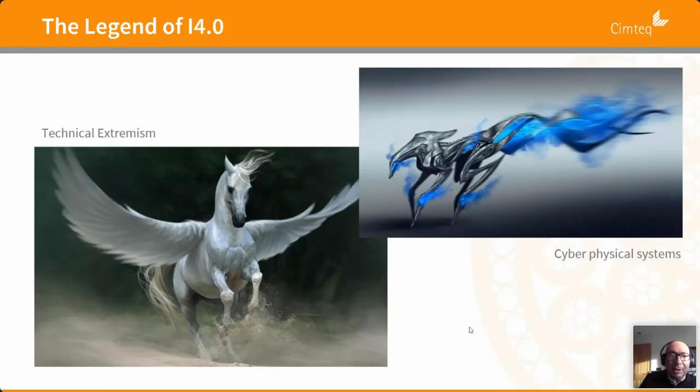Now, things have changed since then, and reality has struck, really. So the reality of Industry 4.0 is to achieve business objectives in the quickest possible way, at the lowest possible cost and the highest possible quality. That is really what we were trying to do with Industry 4.0.

So that said, let's look at what has been achieved over the years, not necessarily in the last year, but in the last few years, where Industry 4.0 technologies have been used. Mainly, we'll talk about that later, MES and digital twinning, etc.

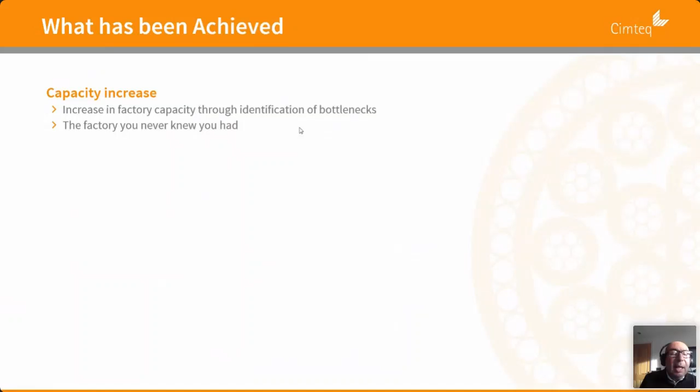What it's done to factories is in the area of production capacity. It has revolutionized that, because by installing an MES system, for example, you're able to look at your production and identify bottlenecks in your factory. By solving the bottleneck issue, removing those bottlenecks from your factories, the products will go through much quicker. It's like a factory you never knew existed, like using extra capacity you never knew existed. With the use of MES, you can see where work in progress is backing up, identify bottlenecks, resolve them, and monitor the progress of that resolution too.

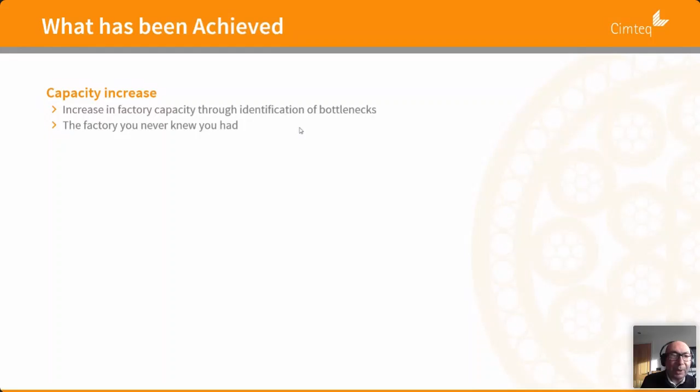Material savings: this is, again, a typical example from one of our customers, using our MES and our cable design system, Cable Builder. The two are linked together, so information is passed from the production lines about radial thickness, or diameter. In the background, we have an SPC analysis engine going on. When that's finished its job, it starts recommending things to the design engineer about how to improve the design, the material utilization on the design. It says, come on, you are giving away too much material, consider enforcing running the process closer to the target, because this factory has been set up for many years. Tolerances haven't been changed, but processes have been improved, and the process in this case is much more capable than the design engineers were designing the cables for.

So they saved a lot of money. This is a jacketing line. They saved a lot of money on materials, so reduce the material usage, improve the profitability of the factory, etc.

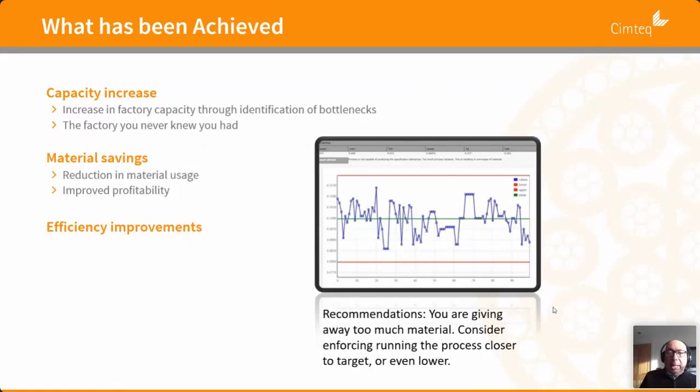And next, I want to come to efficiency improvements. So decreasing of downtime using downtime analysis, increasing machine speed using OEE and various losses analysis, etc. And as linked again to capacity, improving lead times, because we're running faster, you are producing quicker and improving lead time.

And finally, quality improvements. And all this we have seen, this is in the last few years have come out of these technologies. So quality improvements, mistake prevention.

I can give you an example where an operator is busy making a fiber cable. He puts in a reel which contains fiber into a cable, and then this particular machine is connected to MES, and suddenly the machine starts alarming and stops him using that fiber because it's the wrong fiber. So he scanned in the wrong fiber to use on that particular product, and that one incident has saved our customer over $50,000 of scrapped cable. Not to say the embarrassment of shipping something that is wrong to the customer.

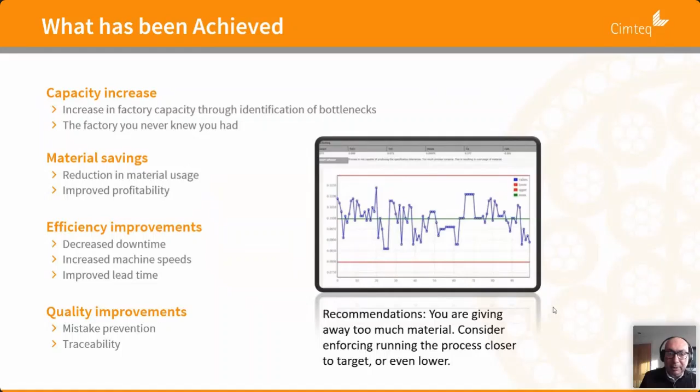Okay, so we talked about what can be achieved with Industry 4.0 and smart methodology, and I want you to remember something. Remember that message that is coming from the machine, effectively, to the design engineer to tell them what to do.

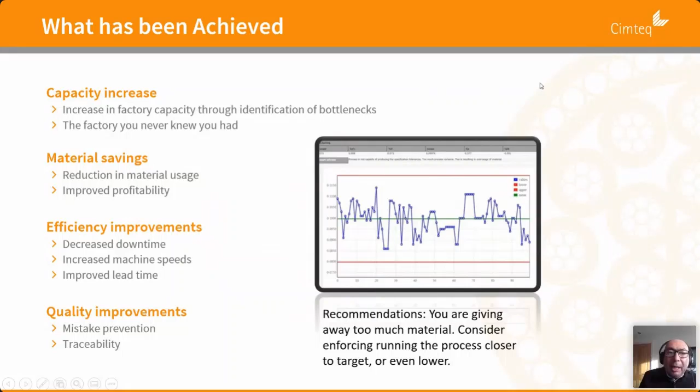I've seen a lot of pictures on the web, etc., saying, okay, what is Industry 4.0? It's the same as Internet of Things. It's the same as smart factory. Well, no, it's wrong, it's not. Also, there is a smart factory, includes Industry 4.0, Internet of Things, and MES. Again, not quite. Close, but not quite.

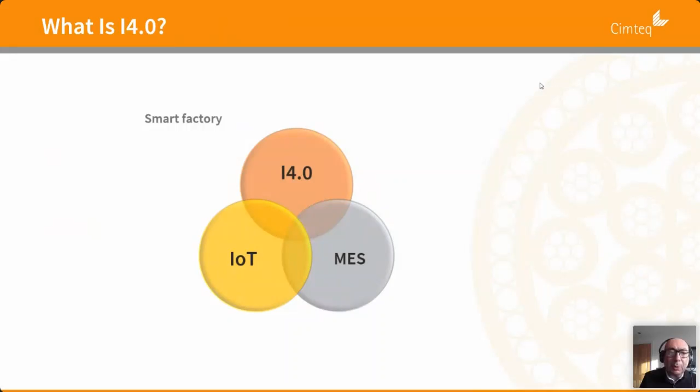But to actually understand Industry 4.0, we need to go a step back, which is to Industry 3.0. These are the days where lean was a big thing, and lean was a methodology that we employed in our cable factories. And then we had technology like automation or PLCs, SCADA, etc. And we had robotics in some factories, which is great. So Industry 3.0 consisted of two things: the technology, which is the automation and robotics, etc., and a methodology, which is lean. And everybody understood lean and worked with it quite well.

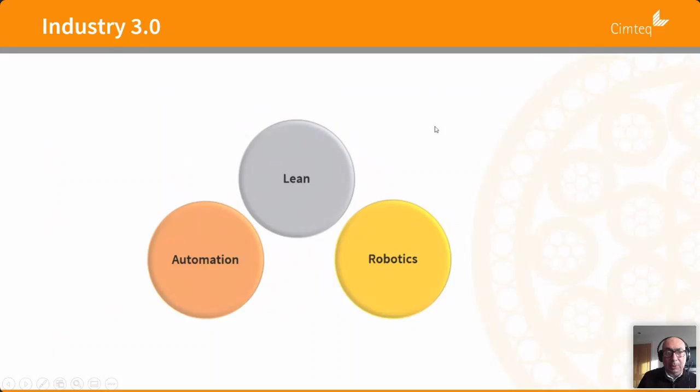So to understand Industry 4.0, it is the same thing. So we've got the technologies like Internet of Things, and incidentally, when it's used within industry, it is now called Industrial Internet of Things. Then you've got cloud computing, you've got MES, and you've got many other technologies, which are the Industry 4.0 technologies. But the methodology is smart, and we will cover that in a second.

It's smart factory. And if you think about smart now in the modern context, it's like mobile phones, smartphones, smart cars. Yeah, if you have a Tesla, it's a smart car. It updates itself, it diagnoses itself, etc. So we'll look at smart in a bit.

Okay, so let's look at some of the technologies in Industry 4.0. Cloud computing, a lot of things are happening on the cloud, quicker, much more global. With cloud computing, you also have to have security, cybersecurity.

Robotics is again part of Industry 4.0. Virtual and augmented reality. Only this morning I was reading about one of the cable manufacturers using these. It's not so straightforward to use them in the cable factory itself, but it's something which we probably want to consider using or utilizing for your customers and your suppliers too, in cooperation with them.

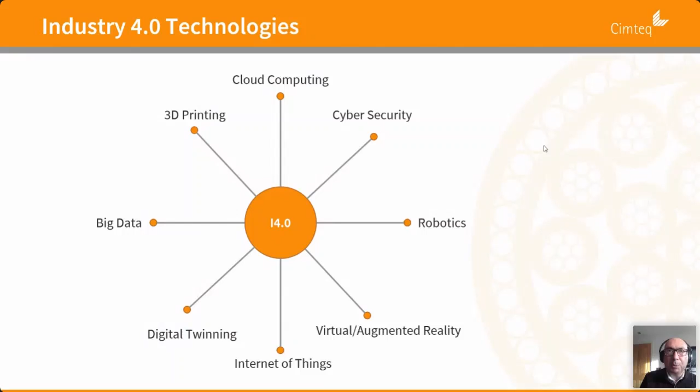Okay, so digitization of factories, that's another name for what is going on right now. Digitization of factory needs a strategy and needs a methodology. Otherwise, it's just an expensive hobby.

So, for example, if you are using lean, don't worry too much about smart. Use Industry 4.0 technologies to help lean manufacturing, to accelerate lean manufacturing, to help you solve the problems, which is the essence of lean. So don't get hung up on the smart bit. Use the methodology that works for you.

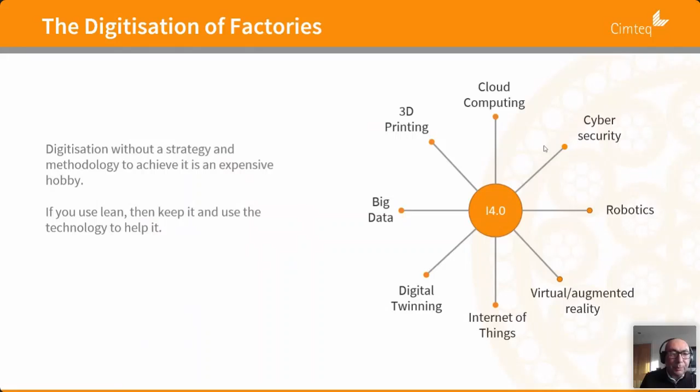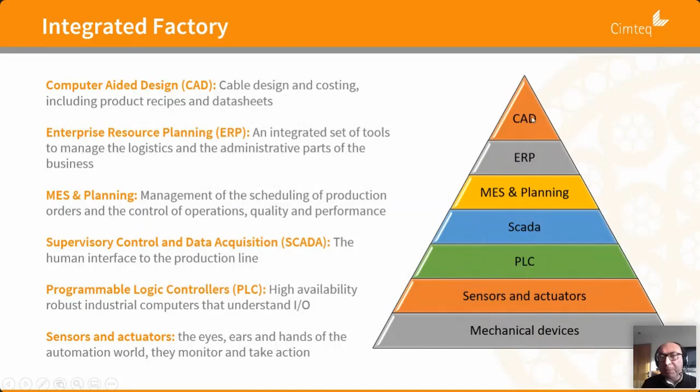We used to talk about the integrated factory, and that helped a lot in the 90s and early 2000s. An integrated factory has many systems shown in a pyramid. You start your design in CAD, it goes to ERP, then MES and planning gets its data from ERP, and eventually the data flows down the pyramid to the PLCs, which then send it to the machine sensors and actuators and all that. Data doesn't really flow in multiple directions - it goes from top to bottom, and sometimes from bottom to top, but it doesn't go all the way to the top. So that's an integrated factory.

In reality, what happens? Somebody designs a cable, they send a quotation to the customer, the customer then orders the product - the cable - and that is done through an ERP system. When you design the cable, the bill of materials and routing also go to, or are held in, the ERP system. Materials are then ordered to replenish the warehouse, from the ERP system.

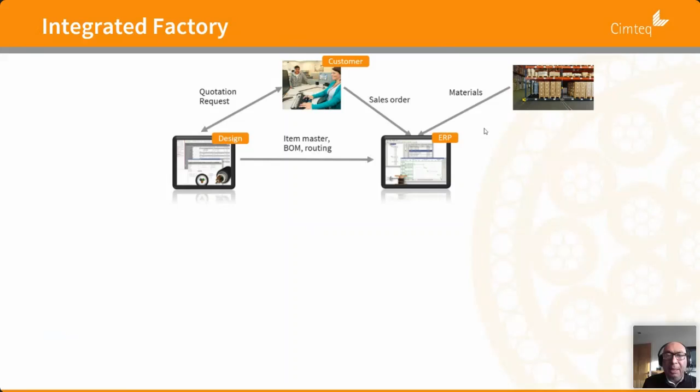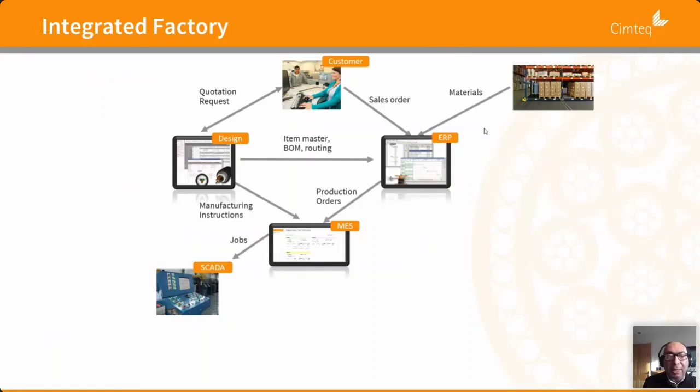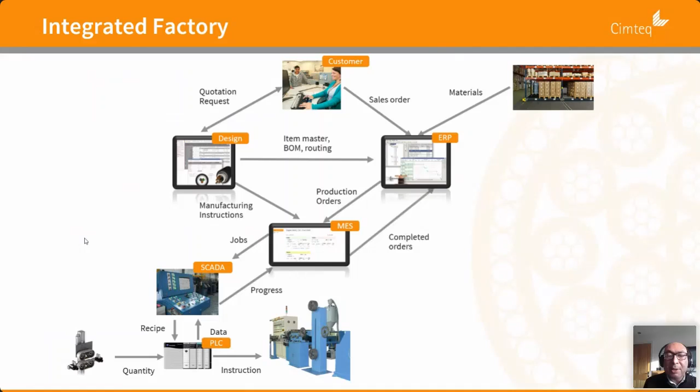When it's ready for production, the ERP system will send production orders to the shop floor with manufacturing instructions. They are sent to the operators, which are then sent to the PLCs, if you're lucky enough to have that level of automation, and machines can be controlled. Usually recipes are held in SCADA and sent to production lines if the lines can accept them, or you have that infrastructure. You also have other devices connected to the PLC, like a length measurement device. Once a production order is complete, progress is reported to the MES to say it's finished, that is then reported to the ERP system, and the ERP system will order dispatch to the customer.

So how does that differ to a smart factory? In a smart factory, a lot of these things still happen, but a smart factory is communicative - there's communication between people, between machine and people, between people and machine, and between systems and machines and machines. And it's adaptable - if there's something that needs to change, it can be changed. The smart factory in its essence can be adapted, same as your smartphone, which is very adaptable - you put an app on it and it does something new. It's also communicative and collaborative, so you are collaborating with other instruments, other people, other machinery, customer to supplier, etc.

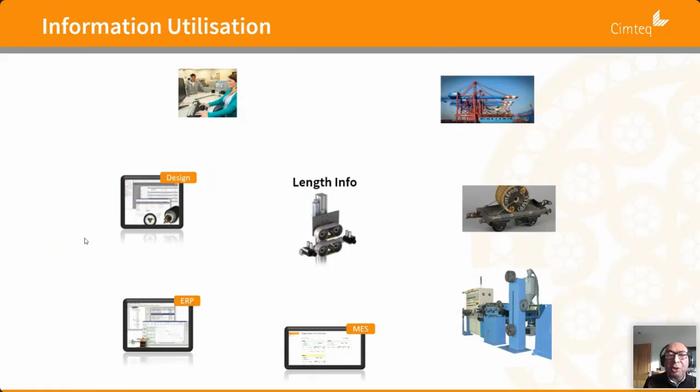This collaboration is also part of the smart movement, if you like. So what does that mean? That means information now flows in a different way, and information is utilized as soon as it is available - no waiting and delays to use that information.

So length information, for example, measured by a length counter, can go directly to ERP and complete orders. It can go directly to a warehouse - sorry, showing a shipping yard there, but it should be a warehouse - to order material to replenish what is being used for a particular production order, etc. The same information can be sent to the design, through some aggregation, to improve the design.

So we saw before about material utilization, but efficiency as well - you can calculate the efficiency of actually running that cable on the machine, calculate OEE, etc. That's very useful in the design aspect and the costing of the cable. Of course, length is used within the machine itself, by production operators and production engineers to influence the efficiency of the machine, again through downtime analysis, breakages analysis, etc.

And short length alarms. In the past, with mechanical counters etc., it was difficult to detect when a short length occurs. But now, when a short length occurs, it triggers an alarm immediately, so somebody could take action before the cable goes further and further value is added to it.

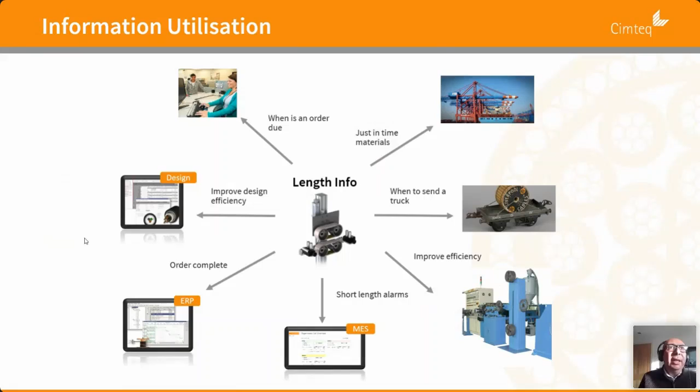The length information can go to sales, and they can inform the customer of the progress of that particular order, where it is. It can be used to order trucks to dispatch a cable on when the length is about to be reached for the final product.

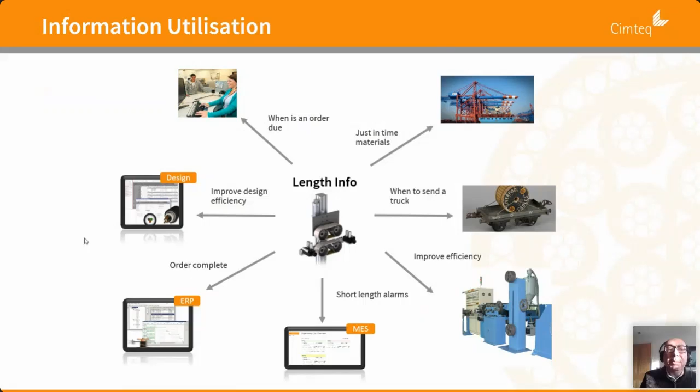So one piece of information is used in multiple areas of the business, immediately for its immediate benefit. How does this work in reality? This works by having an intermediate layer, which we call the Internet of Things, the Industrial Internet of Things platform. This collects information from the shop floor, signals like length, diameter, any sparks, etc, and makes them available to higher systems in the organization, to MES, to ERP, to design departments.

To sales, to other machines, etc. So what we say here is we're democratizing information. Everybody in the business, every system in the business, has access to that information and can use it in a way that is conducive to its operations.

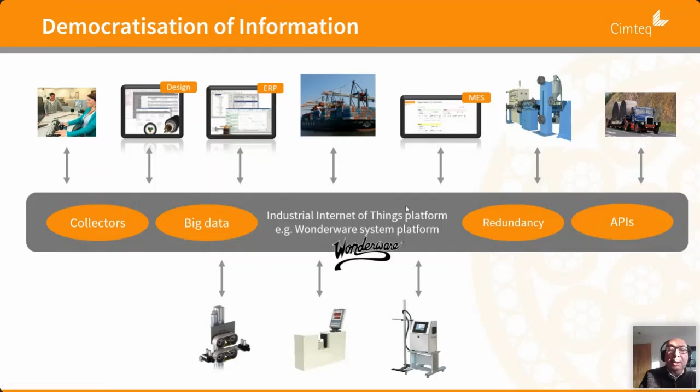So can an extruder be smart? Well, yes, because it will have attributes like communication, collaboration, continuous improvement, adaptability. For example, extruders can now link back to the manufacturers. Data can be gathered on the extruders and sent back to manufacturers to analyze the efficiency of the operation of the extruders.

Extruder software can be downloaded to the machines, to the PLCs and to the SCADA to improve the efficiency of those machines, and that can be done by the manufacturers themselves, under control of local engineers. So now an extruder is adaptable to its environment and the products it's making.

Recipe-driven production - more and more we see recipe-driven production, so you have consistency of a product across different operators, different shifts, etc. And you have recipe management tools like Cable Builder, for example, which will maintain the recipe to the product design, so there's less mistakes, less quality issues that can arise.

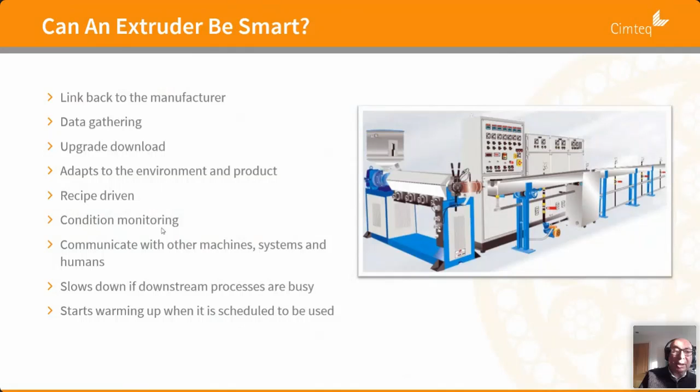So these smart assets - we just talked about extruders, but we also talked about other things which are part of Industry 4.0. There are assets like MES, like digital twinning, like various other assets. This data is a huge asset. So these smart assets are becoming smarter.

But smart assets don't make a smart factory, as they say. A smart factory has to be communicative. You have to use the smart asset for communication, adaptability, and collaboration. And strategy is definitely needed.

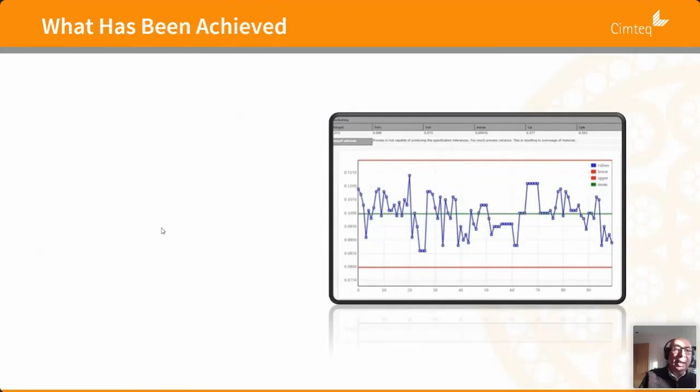So we need to make sure information is correct from the source and correctly used in this scenario too. Okay, so let's just go back to see what has been achieved now in the past 2 or 3 years, really. Capacity improvements in factories - that has been quite a revolution. Factories have doubled their capacity in some cases.

I know one factory who thought their bottleneck was the stranding line, and after doing some analysis, eventually found out the bottleneck is actually the armoring line. By resolving that, they really accelerated the throughput through the factories - they built a new factory almost.

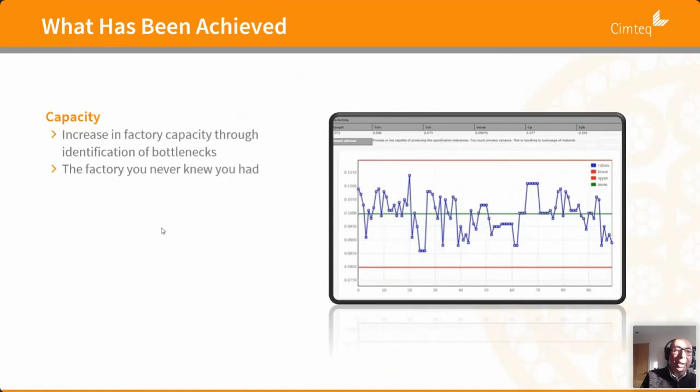Material utilization - we saw how somebody saved a lot of money by the system communicating with the design engineer to say, you're doing something not wrong, but out of date. We saw how mistake prevention saved the company a lot of money.

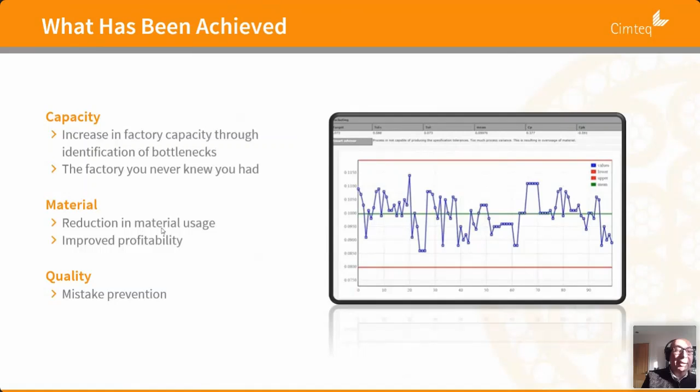So it's a smart thing to invest in the smart tools, as I say. But is it the right time? Well, contactless remote working has really pushed that forward as well.

So you don't need to step into the factory to monitor what's going on. It is with the current situation, and hopefully that will go away. But what it has done is actually enable remote monitoring, having alerts rather than going and searching for problems. Problems will come to you. When a problem is detected, you will get an alert, a notification, and then you will have all the information at your fingertips to resolve a lot of these problems remotely.

So there is less substantial involvement with the direct physical shop floor at this stage. Everything can be done remotely.

And this is what I call electronic self-service as well. So when you get a notification there is an issue, you can very quickly go and historically look at, okay, there's a problem with the extruder, something. You can go backwards and say, well, okay, what was the pressure on the extruder when that problem occurred, etc. If there's a quality issue, you can trace it back to what happened on that machine on that particular day, on that particular batch. It's actually by batch, not by time, when it comes to using this information.

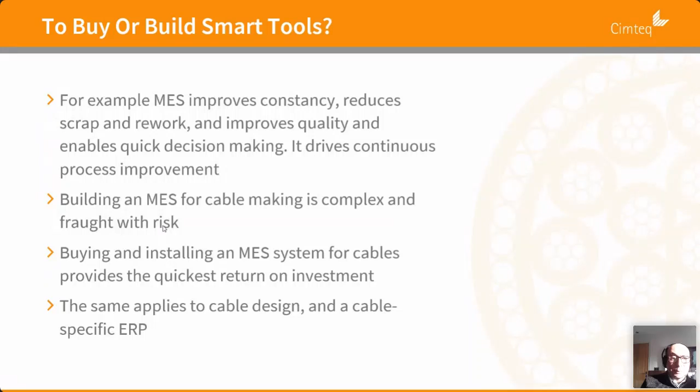Okay, smart assets, as I said, smart software, smart machines, a lot of things are becoming smarter, and they are on the market. So really, I ask you to work on your smart strategy, and the next webinars will help you with those as well. And be disruptive, because these technologies, they're not passive. You have to be prepared. And again, go back to the smart factory. The smart factory has to be adaptable. It has to be communicable, and has to be continuously improving.

So you will see disruption, but disruption is good in this case, because if you keep doing the same thing, you will get the same results. If you want different things, you have to disrupt the status quo. So yes, please do go ahead and have a strategy and implement that strategy for being smart. Not forgetting, again, your existing methodologies. If you're using Lean, include that as part of the smart factory. And thank you for that.